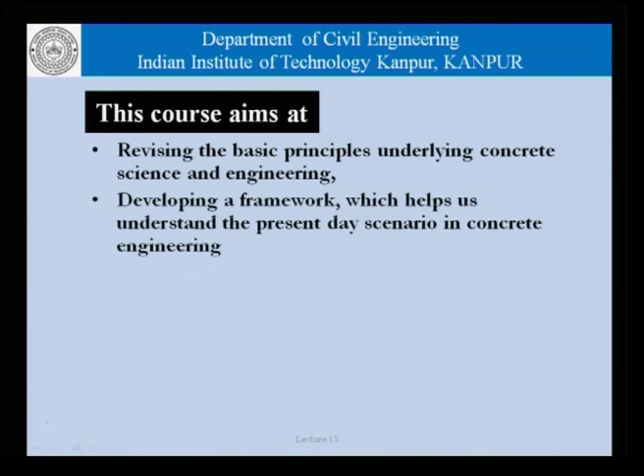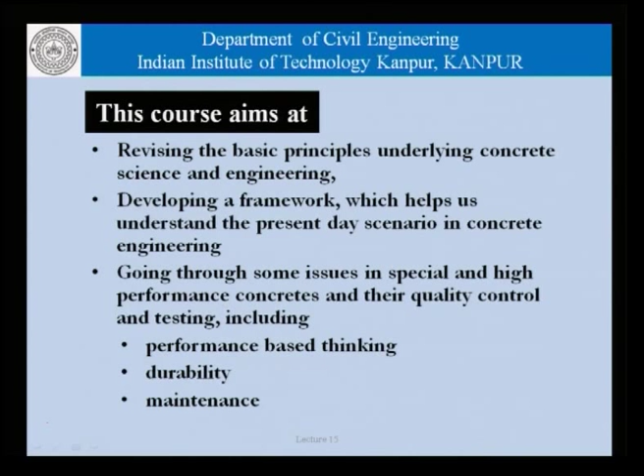Namaskar and welcome to this course, this lecture on concrete engineering and technology. In this course, we are trying to study the basic principles underlying concrete science and engineering, developing a framework which helps us understand the present scenario in concrete engineering with the use of different mineral admixtures, chemical admixtures, construction technologies, and so on. We are going through some issues in special and high performance concretes and their quality control, testing, which includes performance based thinking, durability of these concretes, and maintenance of the structures made using these concretes.

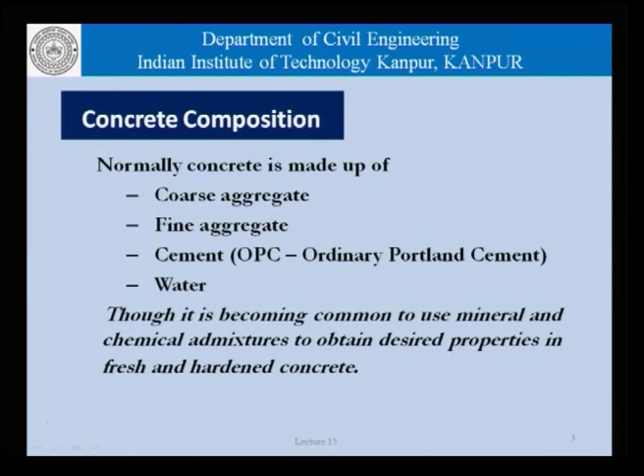To reiterate, normally concrete can be taken to be a mixture of coarse aggregate, fine aggregate, cement. Ordinary Portland cement is what we refer to most of the time in the traditional sense, and water. Even though it is becoming increasingly common to use mineral and chemical admixtures to obtain desired properties in fresh and hardened concrete, an understanding of the basics always helps in building a foundation which is required to understand some of the special concretes which we will be talking about today.

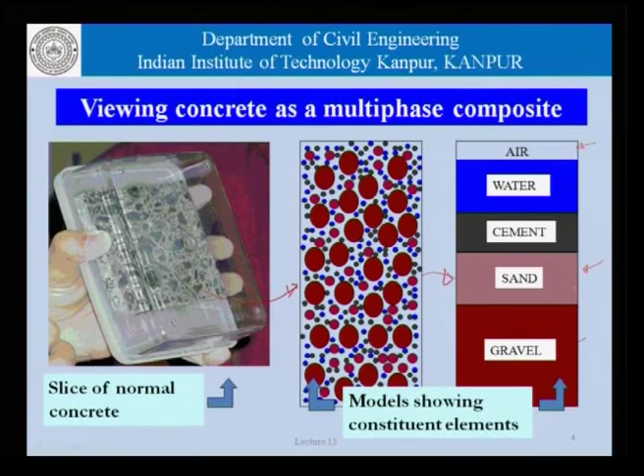The properties of fresh concrete, properties of hardened concrete are basically determined by the properties of the constituents and the proportion that we use. We must remember, in proportioning concrete, we have seen that at the end of it, all the constituents of concrete should contribute a certain amount in terms of volume to the 1000 liters or a cubic meter, and that is what we get as unit content of different materials.

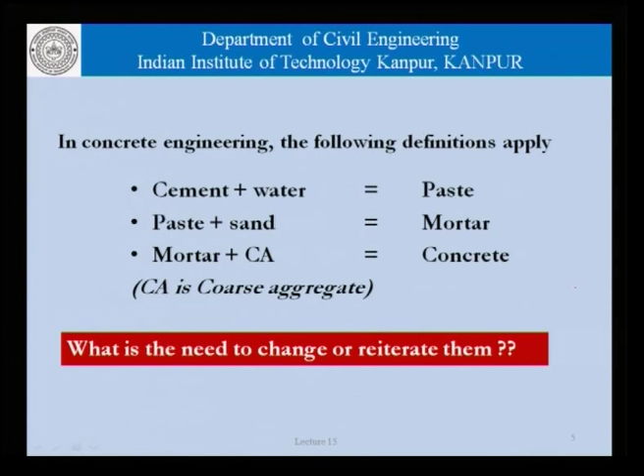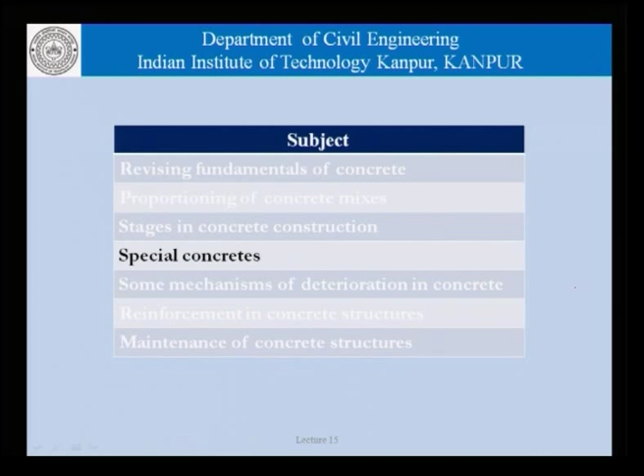This again is the broad outline of the course, which talks of fundamentals of concrete, proportioning concrete mixes, stages in construction, special concretes, mechanisms of deterioration, reinforcement material used in concrete, and maintenance. And today the discussion focuses on special concretes. What is a special concrete?

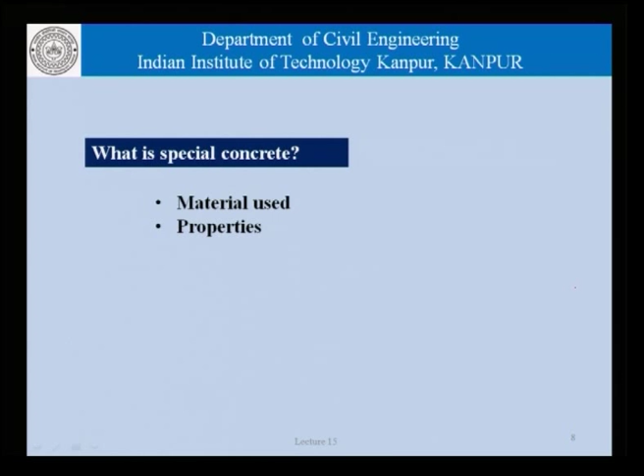And we have tried to answer this question before. It could be based on materials that we use in the concrete. It could be based on the properties of the concrete that we are talking about. A concrete could become special because the method of placing or casting or curing of that concrete is something different, or the environment in which the concrete is cast or placed is different.

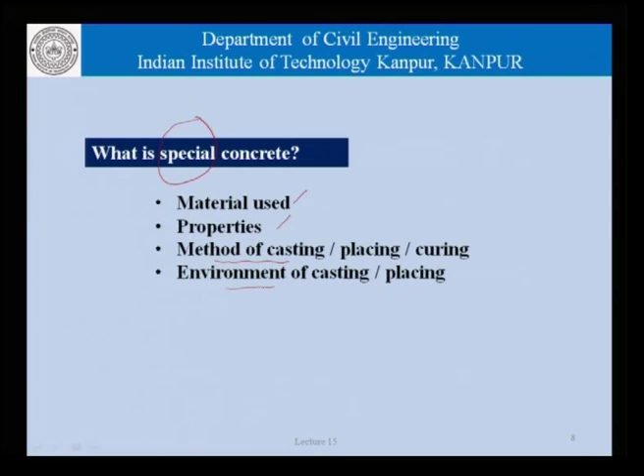What this clearly shows is that in order for a concrete to be special, it has to be different from normal, and therefore, for the materials, properties, the method of casting, the environment of casting, for each of these issues, we must have what we will define or what we understand is normal. If any of those conditions changes, then the concrete becomes special. The concreting method becomes special.

Now, as far as materials is concerned, apart from coarse aggregate, fine aggregate, cement and water, we could use fibers, we could use mineral admixtures. Even if we assume that using mineral admixtures like fly ash or blast furnace slag has become common practice, either in the form of blended cements or as additives in concrete itself, there is a special issue involved when we use high volumes of fly ash, and that is possible and is done in certain specific applications.

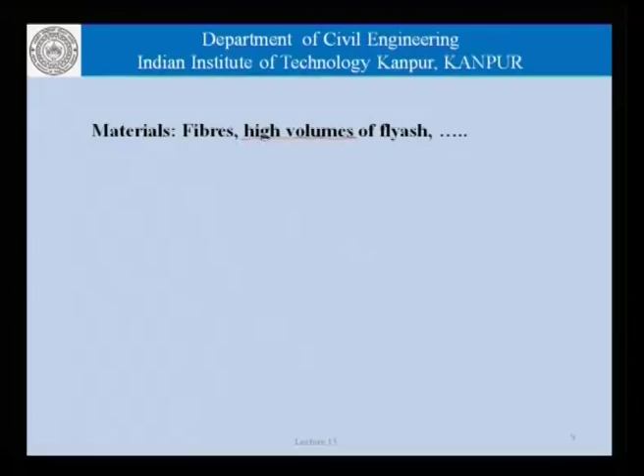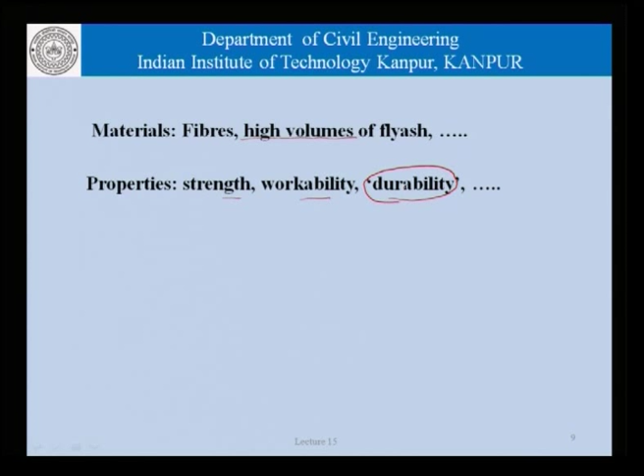Similarly, properties. We talk of properties of concrete in terms of strength, workability, durability. Now, strength is the property that is supposed to be representative of concrete. Most concrete engineers or designers, they talk in terms of characteristic strengths of concrete, and they say, well, M40, M50 and so on. So, what is the normal range? And if it is higher than that, then it is special concrete in terms of high strength concrete. At times, we also try to develop low strength material that need not be used for reinforced concrete construction, but has certain other applications. So, that again is a special concrete.

Similarly, workability. Depending on the method of construction that we use, if we are using normal methods where concrete is carried by wheelbarrows or in pans manually, then we need a certain amount of workability. But if we are trying to pump the concrete, then we need another kind of workability. We need the concrete to be flowing sometimes. So, that is what makes it special.

Durability is a very different kind of property, and attention on durability as a property of concrete is not all that old, even though the importance of different parameters such as water cement ratio, cement content, type of cement used, and their relationship with the environment in which the concrete structure is placed is age old. Specifications did say what are the limits of water cement ratio.

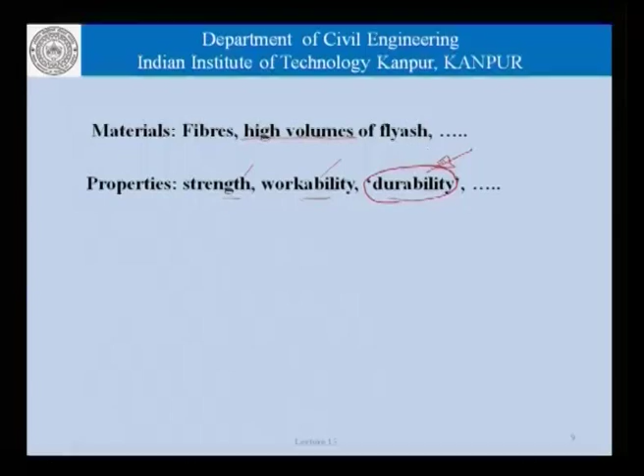As far as methods of construction are concerned, shotcreting, where concrete is gunited onto a surface without formwork, or where concrete is compacted using vibratory rollers, for example in the construction of roads, these are concretes which call for special attention.

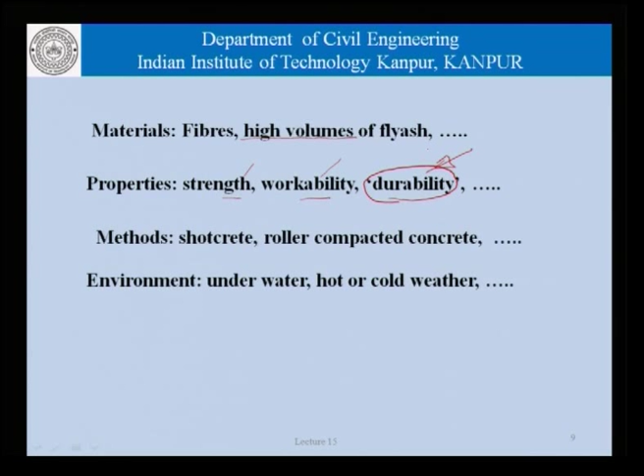As far as the environment in which the concrete is placed, underwater, hot weather, cold weather, these are situations which call for special attention as far as concrete and concreting procedures are concerned. Now, let us look at examples of special concretes, several of them: self-compacting concrete, fiber reinforced concrete,

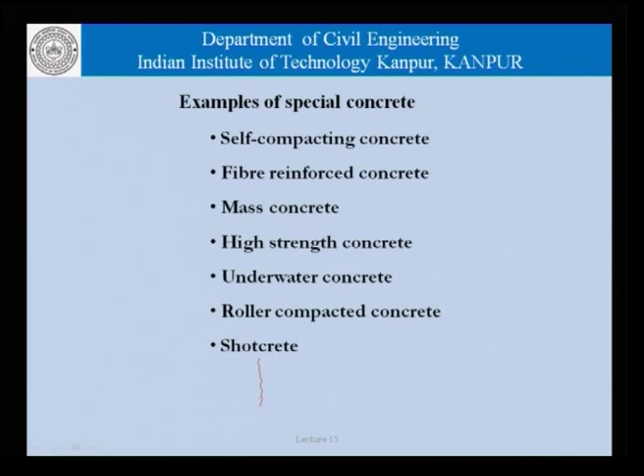mass concrete, high strength concrete, underwater concrete, roller compacted concrete, shotcrete, and that list can go on and on. Now, these are all special concretes because of one or more of the reasons that we discussed, in terms of materials used, in terms of the method of construction, in terms of the properties, or in terms of the environment.

Having said that, it is not possible to develop a special concrete purely based on one of the issues involved. Concrete engineering involves, from another point of view, several aspects. One of them is materials and proportioning.

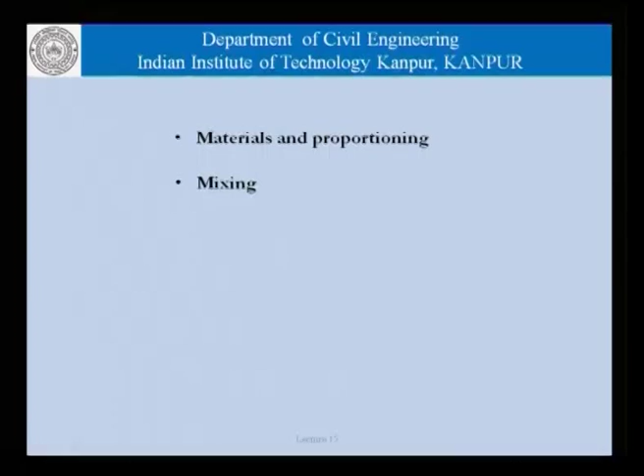What is the kind of materials we use? What is the proportion that we use? What is the process of mixing the concrete? What kind of mixer, volume of mixer, method of mixing, time of mixing, how is the concrete transported, agitator trucks, conveyor belts, and so on.

How is it placed? How is it vibrated? Form vibrated, internally vibrated, not vibrated at all. How it is cured, curing compounds, membranes, gunny bags, underwater, and so on. So, all these considerations are important when we talk of concrete.

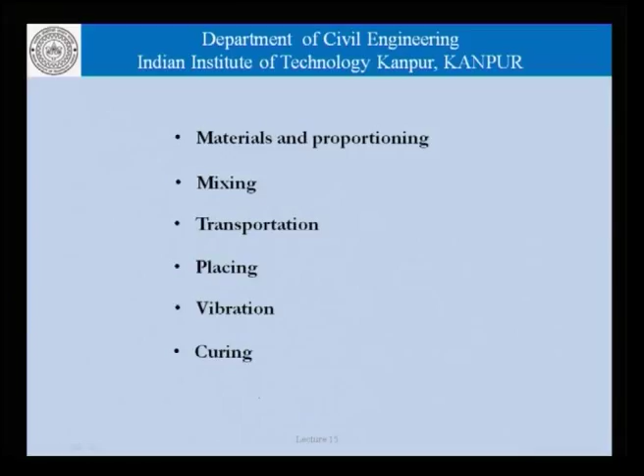Now, when we talk of special concretes, this whole thing is interrelated. So, if we are talking of a special concrete from the point of view of strength, then not only is the materials and proportioning different, but that has implications in terms of mixing, placing, vibration and curing. So only a comprehensive view of all these issues will help us properly handle special concretes.

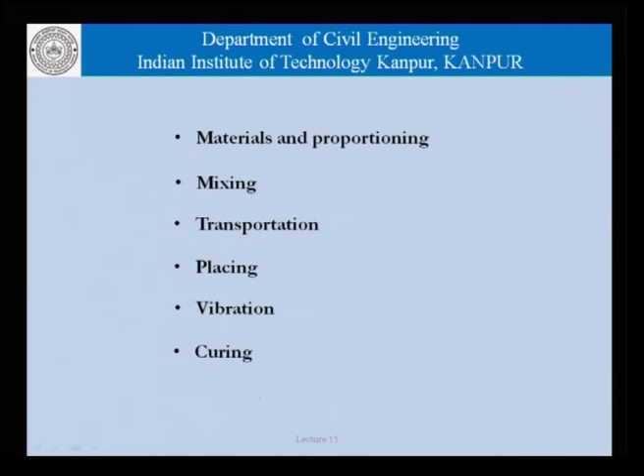I have not even talked of what is high performance concrete. Let me share with you a small digression. In the late 80s and early 90s, the term high performance concrete in concrete engineering was being widely touted, and there was a school of thought that at the end of it, the performance of concrete is basically strength. So high strength concrete is the high performance concrete. Performance and strength were related, supposed to be almost synonymous.

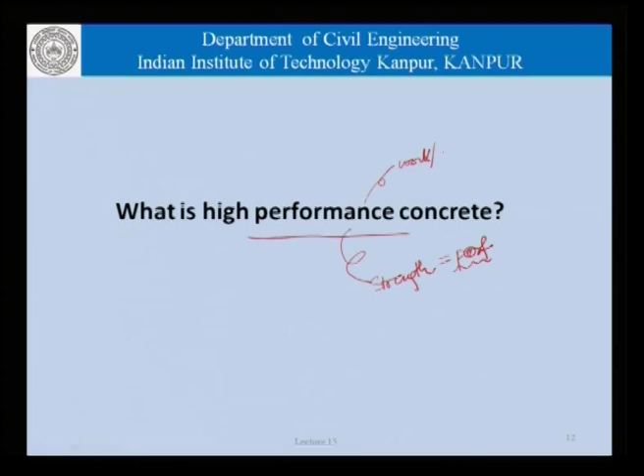But there was another school of thought, researchers and engineers working on other parameters, like workability, or a concrete which did not require to be vibrated, which would help us produce concrete of more uniform quality. That was touted as performance. So finally, what has happened is that no matter what parameter we use, it could be workability, strength, or durability, so long as the performance of that concrete is higher than what is normally expected on that parameter, the concrete can still be called a high performance concrete.

Now, we have talked of these examples of special concretes, and today we will focus on high strength concrete.

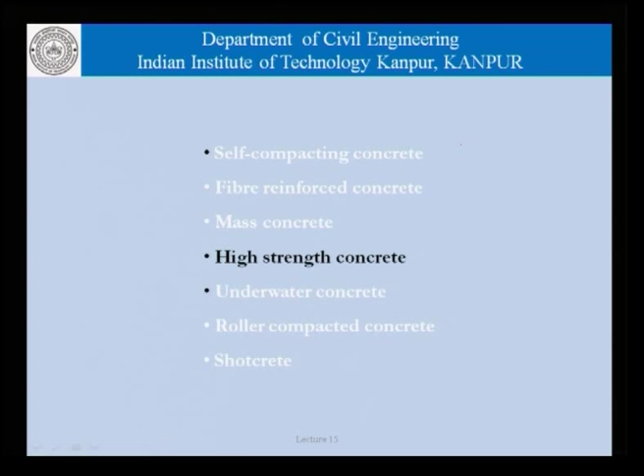Now, as the strength of this mortar phase is increased, how do we increase it? We know that the only way that strength can be increased is by reducing the water cement ratio, that is, either put more cement or use less water. So as we increase the strength of the mortar...

We get higher and higher strengths, so long as the ITZ does not become a bottleneck. In high strength concretes, we are talking of a situation where the mortar phase is very strong. The strength of the mortar phase itself depends on the porosity and the pore size distribution, more porosity than pore size distribution perhaps. So in high strength concretes, we try to control the porosity, which we know is related to the water cement ratio. Once we keep in mind that in high strength concretes we have reduced porosity because we use very low water cement ratios, the strength of the mortar phase is much larger or much more than in traditional concretes.

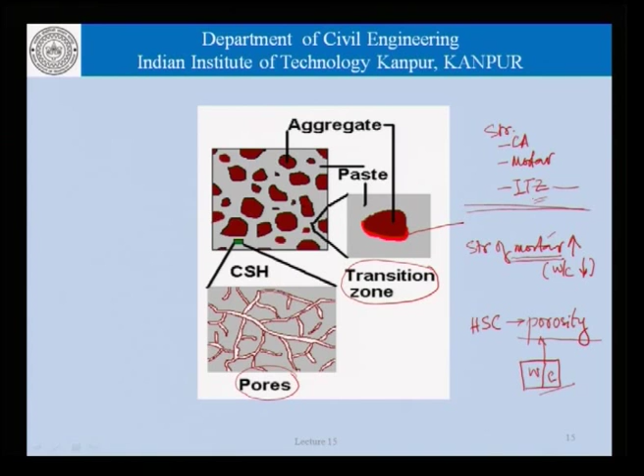The ITZ is also stronger. There is less bleeding in the concrete, and therefore the ITZ formed is not that high in water cement ratio. Then we will be able to appreciate and discuss the properties, the construction method, the proportioning and so on of high strength concretes with a lot more ease.

Now, once we talk of high strength concretes, we must remember that there is no universal definition of high strength. High strength simply means high strength, but then there are different norms of what may be called high strength. For example, the Japan Society of Civil Engineers puts down a level of characteristic strength of 60 to 100 newtons per millimeter square to be treated as high strength concrete.

IS 456, the code in India, mentions 3 categories of strength: ordinary, which is M10 to M20, standard, which is M25 to M55, and high strength, which is M60 to M80 concrete.

So we should remember that specifications such as the JSCE and IS 456 define characteristic strength on the basis of tests of cylinders and cubes, and the grade cannot be directly compared only on numbers. The JSCE defines these values in terms of cylinders with 100 mm diameter and 200 mm length, whereas IS 456 talks in terms of 150 by 150 by 150 mm cubes.

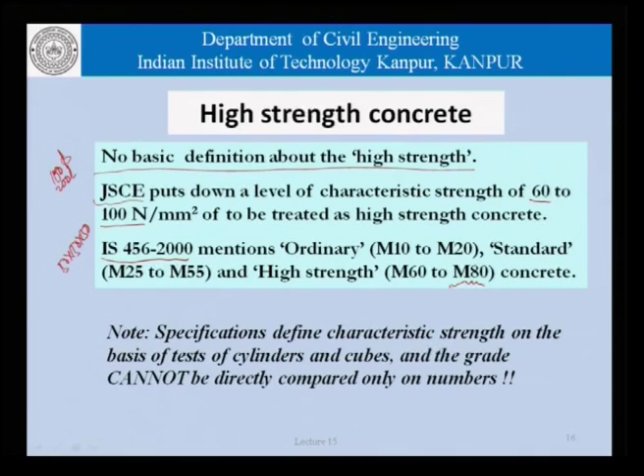That is something we must bear in mind when talking of high strength concrete. As to who is talking about high strength concrete, what specification provisions will apply depends on one specification to another. For a particular strength, one specification may say provisions relating to high strength concrete apply, whereas another may say no, they do not apply, it is just normal concrete.

As far as concrete strength is concerned, we should also remember that concrete structures are built in the field. They are normally not factory made products, and therefore the strength we are talking about, even though based on laboratory tests of cylinders and cubes or whatever the specifications may require, what the engineer keeps in mind is that finally the strength has to be achieved in the field with conditions of transportation, placing and curing as may be applicable, and the technology available in the field. That is why different specifications drawn by different countries naturally take into account the kind of construction technology that is normally used.

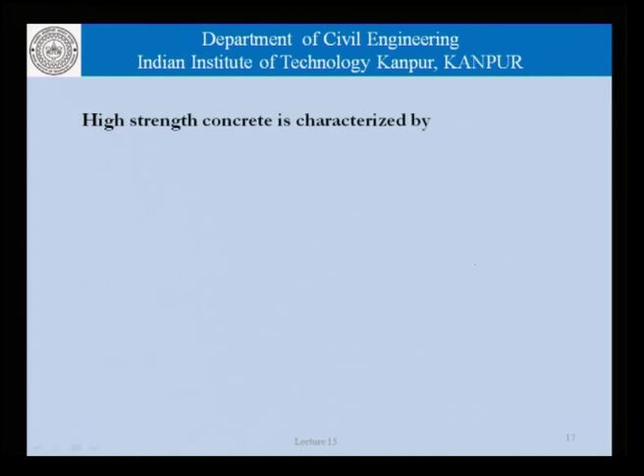High strength concrete is characterized by low water cement ratio. Unless we lower the water cement ratio, the water available beyond that required for hydration of cement cannot be controlled, and that excess water is responsible for the creation of pore spaces. If we reduce that excess water, the amount of pores generated is less, porosity is less, and strength is high. So high strength concrete is characterized by low water cement ratios, typically 35% and below.

How can we reduce the water cement ratio? One is to reduce the water content, but we cannot reduce it below a certain level because that is the minimum required for workability and so on. Therefore, the only other option we have is to increase the cement content.

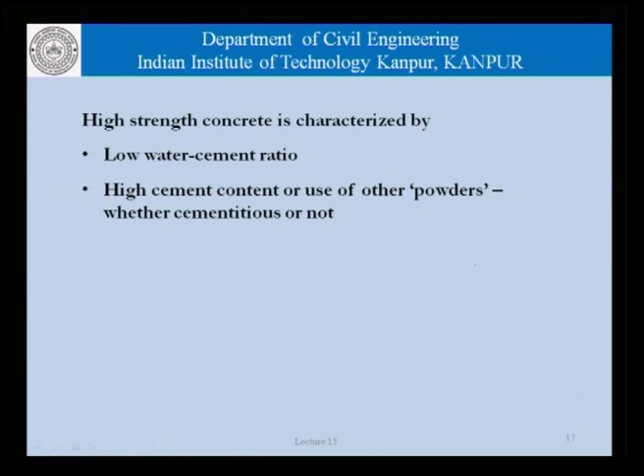So high strength concrete is characterized by high cement content or use of other powders, whether cementitious or not. Using high cement content has its own implications in terms of heat of hydration, economy and so on. But since we need not only cement, but also need to increase the paste content, we very often use mineral admixtures such as fly ash, blast furnace slag, or silica fume to increase the strength.

Some of these products contribute to strength by formation of the CSH gel in the secondary pozzolanic reaction, or they simply occupy the spaces in the pore space, reducing porosity, or they just contribute to the paste content by sheer presence. Things like stone dust would be in that category. They do not necessarily participate in the pozzolanic reaction, but their fineness is such that they can be counted towards paste content, which is also required to be increased for high strength concrete.

One of the options we mentioned was reducing the water content. Reducing the water content can be achieved through high doses of superplasticizers. We have seen an example where, by using a certain amount of superplasticizer, we can reduce a certain amount of water demand for a given level of workability. So if we want to reduce the water content for a given amount of workability, using superplasticizers is almost the only way out.

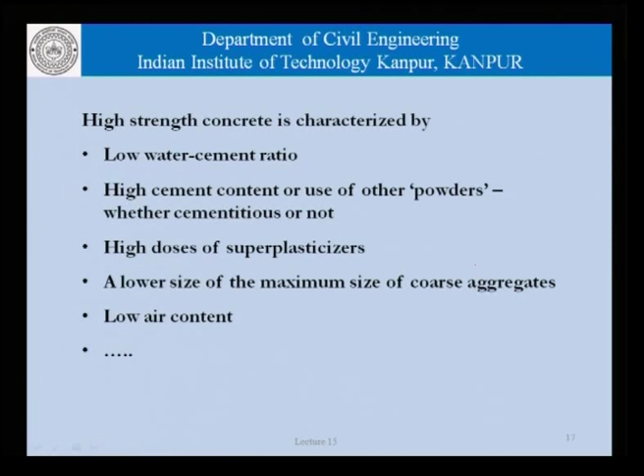Low air content. High strength concrete is also characterized by a low air content. We shall see in a slide the provisions related to air content. There could be a lot of other properties which we can list and enumerate as far as high strength concrete is concerned.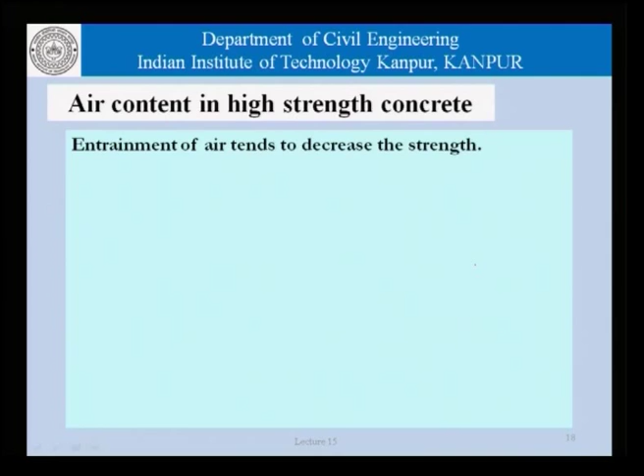Now, coming to air content in high strength concrete, it is known that entrainment of air tends to decrease the strength. Even though we do air entrained concretes for different reasons, we do not explicitly take that into account because of other benefits that follow. But indeed, air at the end of it contributes to some kind of voids being created within the concrete, and that tends to decrease the strength at least to some extent.

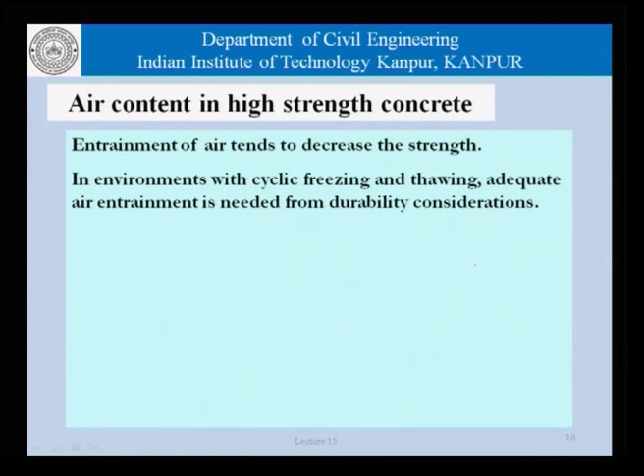As far as high strength concrete is concerned, that is quite an unacceptable position, and therefore we must try to control that. In environments with cyclic freezing and thawing, adequate air entrainment is needed from durability considerations, but prescribed lower limits on air content could be, if no freezing and thawing is present, around 2%. But if freezing and thawing resistance is required, the air content requirement goes down as the required strength increases. So basically the designer makes a choice that if we push the strength higher, we have to sacrifice the air content.

We cannot get the benefits of air content all the time. So as far as normal concrete is concerned, we can have 5% or 6% air sometimes, but once we get into high strength concrete, strength ranges of 60, 70, 80 and so on, the air content has to be restricted.

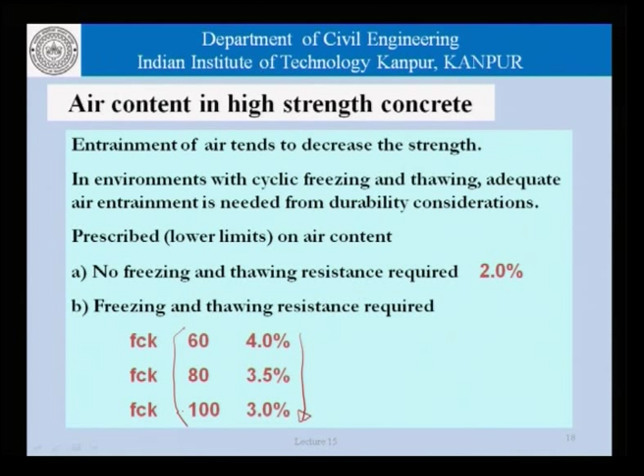Let us talk a little bit about some of the considerations that weigh on the mind of an engineer as far as high strength concrete is concerned.

Because of the low water cement ratio and the high cement content, high strength concrete could have large autogenous shrinkage and large amounts of heat liberation on account of heat of hydration.

Traditionally, mass concrete was defined as concrete where the structure was large or the pour volume was large, to the extent that the heat dissipation that took place from the surface was not sufficient to handle the heat liberated.

In the case of high strength concrete, even with adequate surface area, because the amount of heat liberated is large, because the cement content is high, even concrete members of the size that would normally not be considered mass concrete would have to be treated with provisions of mass concrete.

Once we have mass concrete related considerations or shrinkage related considerations arising out of the high amounts of cement, we could have cracking in the concrete, non-structural, but cracking nonetheless. That is something which will require special attention from the point of view of water tightness, durability and so on.

High strength concrete is very good as far as durability is concerned because porosity has been reduced, but if we allow cracks to form in high strength concrete, then the whole purpose is lost. As concrete engineers we must keep in mind that having a high characteristic strength of concrete is not really good enough to ensure high durability. For durability, we need to do a lot of other things other than strength, such as controlling cracks and so on.

Further, strength of concrete in the structure itself is of concern given the difference in curing regimes, the scale of casting and so on.

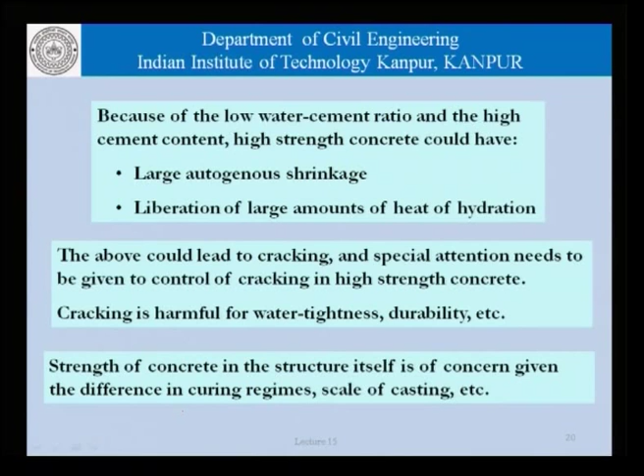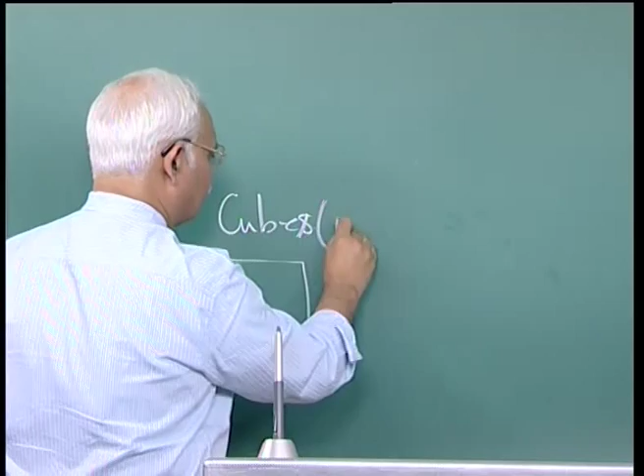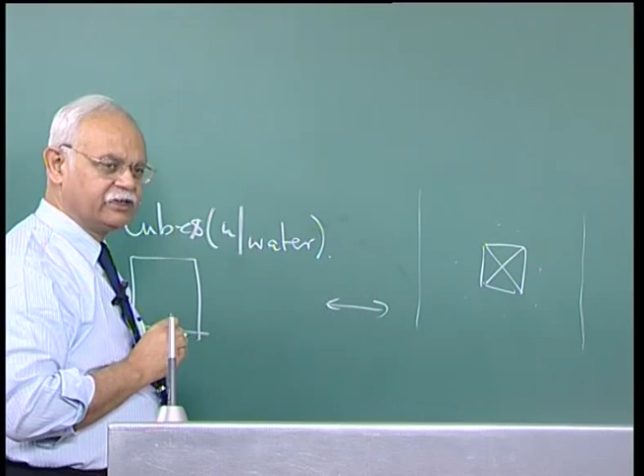In a normal concrete, if we do the quality control using cubes which have been cured underwater versus a situation where a certain member has been cast and the concrete is sitting here, in normal circumstances, the environment here as far as temperature and so on is concerned is not so different from this atmosphere. But when it comes to high strength concrete, the temperatures here are higher than normal.

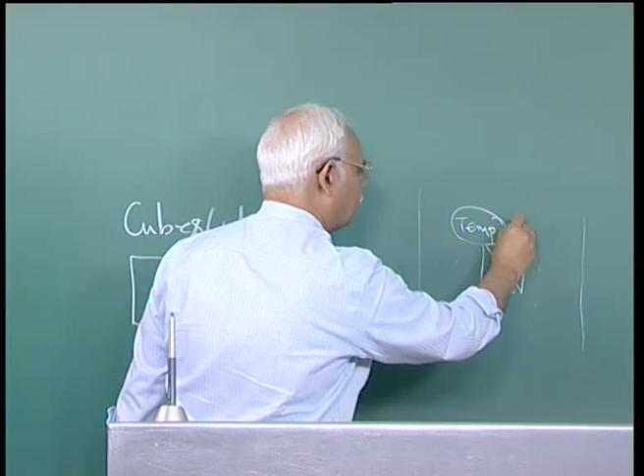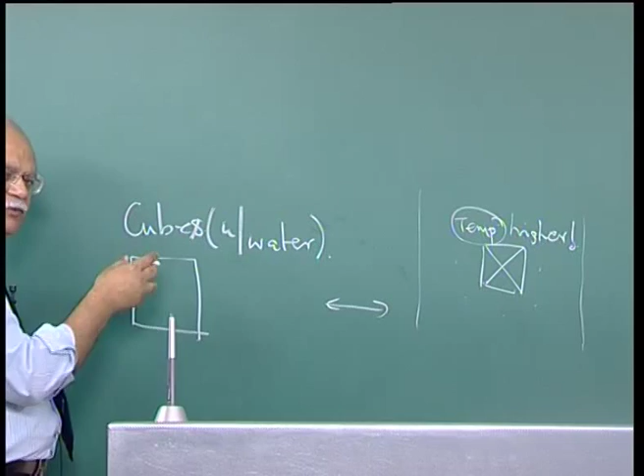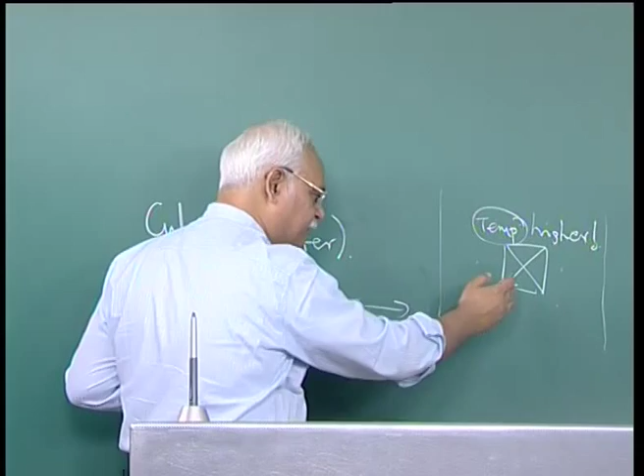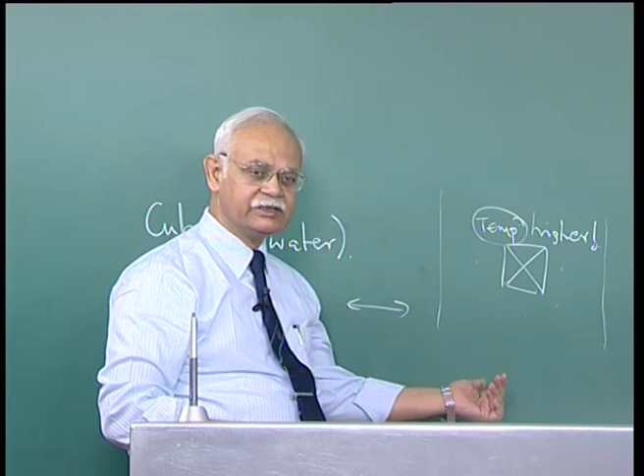Therefore, when we cure the cubes, the curing regime of cubes which are used for quality control is quite different from the curing regime or the environment surrounding the concrete in a high strength concrete structure. This difference starts becoming prominent and has to be accounted for in our quality control procedures and also in attempts to figure out what is the strength of concrete in the structure.

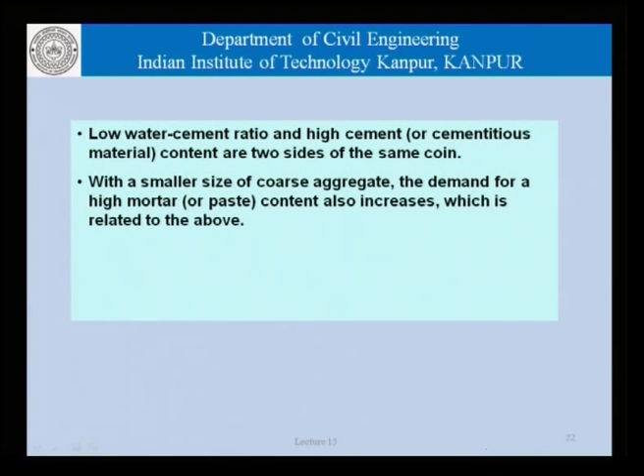Now, low water cement ratio and high cement or cementitious material content are two sides of the same coin, and we have already talked about that. With a smaller size of coarse aggregates, the demand for high mortar or paste content also increases, which is related to the above. That causes us to use more powder in the system, and the concrete becomes more homogeneous in the absence of the larger coarse aggregates.

Concrete is not a homogeneous material at the millimeter level. It can be considered homogeneous if we consider reasonably larger unit sizes, and that unit size which is required to be considered for concrete to be assumed homogeneous is related to the maximum size of the coarse aggregate used.

If we are using large coarse aggregates, then we will have to consider a much larger area in order to say that, okay, if that area is replicated all over the place, the concrete is homogeneous. Those of you who work or have a background in finite element analysis would understand this concept very simply. In order to assume that concrete is homogeneous, you are making an assumption that the aggregates, the mortar, and the ITZ all have the same strength, which is obviously not true.

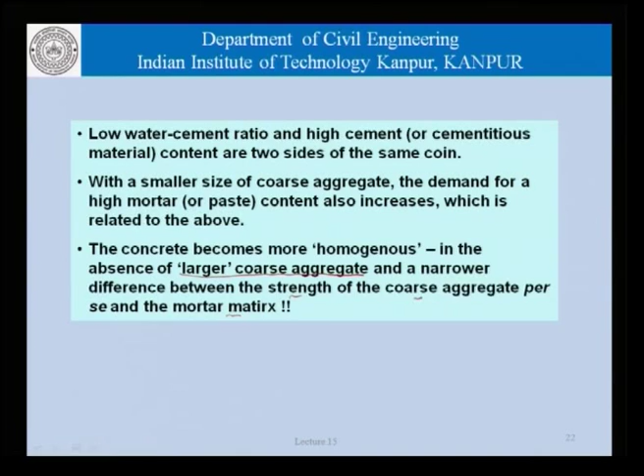So, if we are able to remove the larger coarse aggregates, the concrete becomes more homogeneous, and also the gap between the strength of the coarse aggregate and the mortar matrix is narrower. So, compared to normal concretes, high strength concretes are more homogeneous.

Now, this concrete becoming more homogeneous has very interesting implications. Crack growth becomes more rapid and the concrete is more brittle than normal strength concrete.

The crack growth in concrete relates to the stress strain curve. The stress strain curve is only a representation of how the material deforms as stresses are applied, and as stresses are applied, more cracks are formed in the system. So indirectly, the stress strain curve can be taken as a representation of crack formation and crack propagation in concrete.

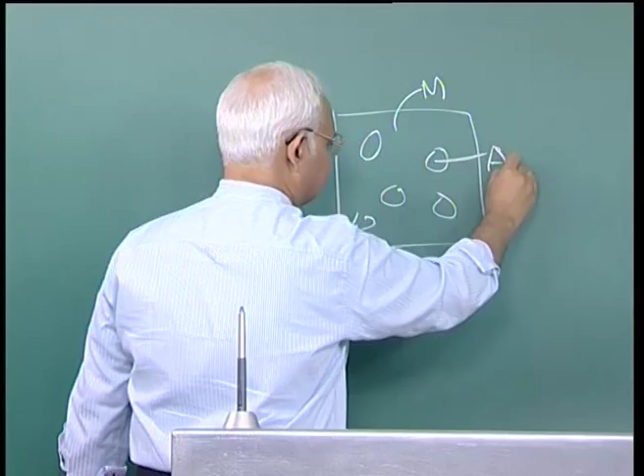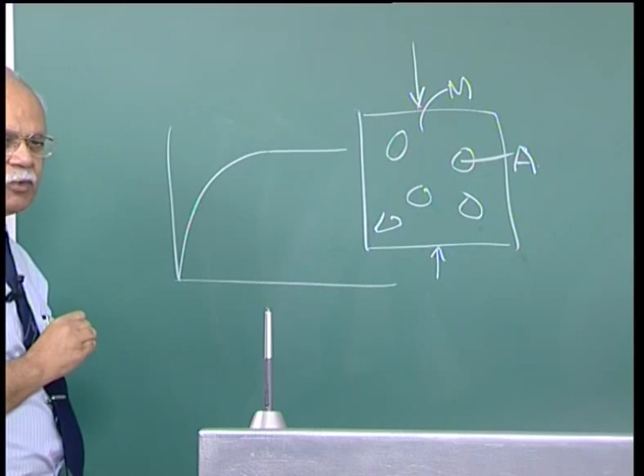As far as normal concretes are concerned, if we look at a normal concrete, there are aggregates and we have mortar. Now, if load is applied on this concrete, we get the stress strain curve. We know that this is one of the model stress strain curves which are used.

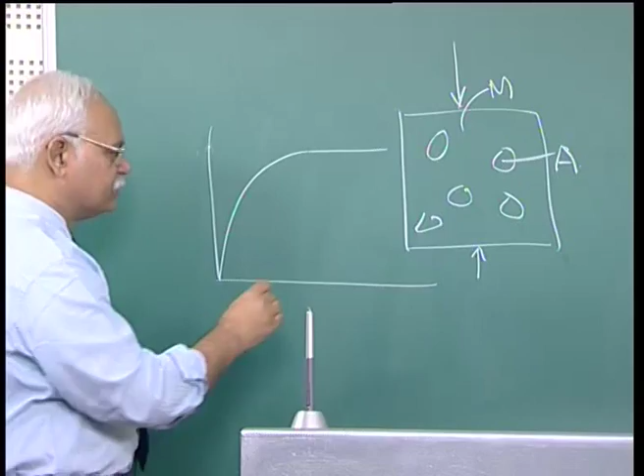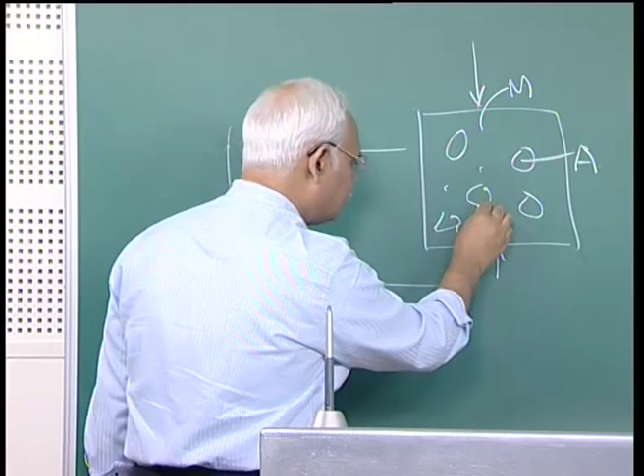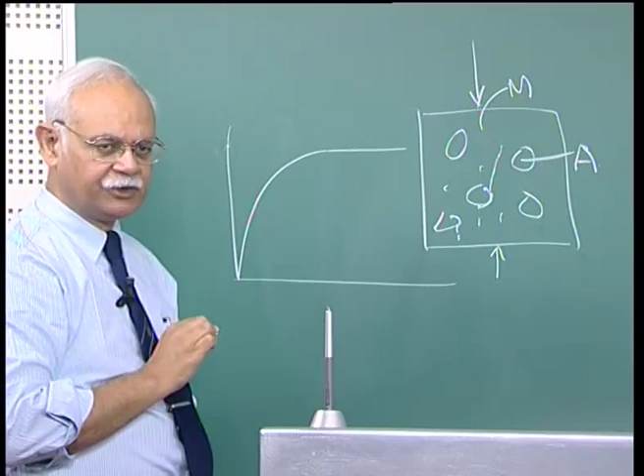Why is it non-linear? Because as micro cracks are formed here initially, they tend to connect at the coarse aggregates. Some kind of crack propagation takes place through the interfacial transition zone, and then larger cracks are formed, which cause the concrete to fail.

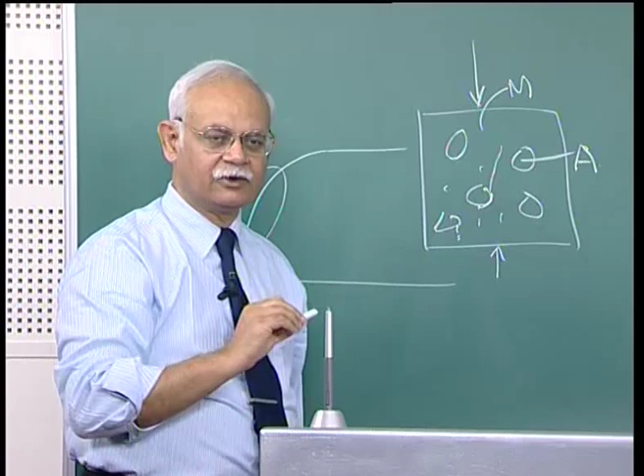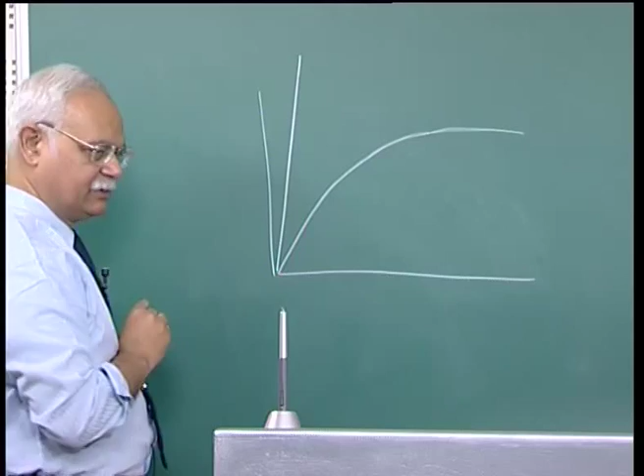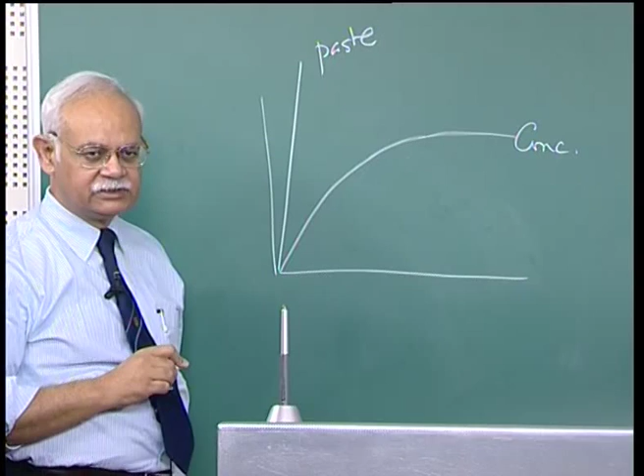In the case of high strength concretes, this process where cracks have a stable growth does not exist. So if we look at the stress strain curves of concrete and paste, this is the stress strain curve for concrete and this is for paste.

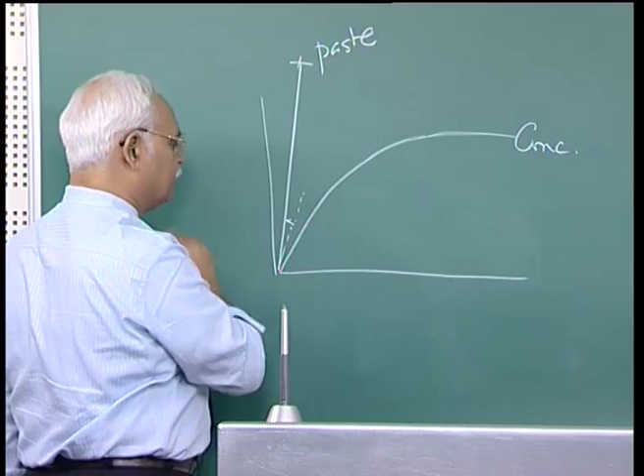Because the material which is paste is more homogeneous, the crack propagation is rapid and the material is more brittle. So the high strength concrete tends to come closer to paste, and that is something we must keep in mind when we talk in terms of properties of high strength concrete.

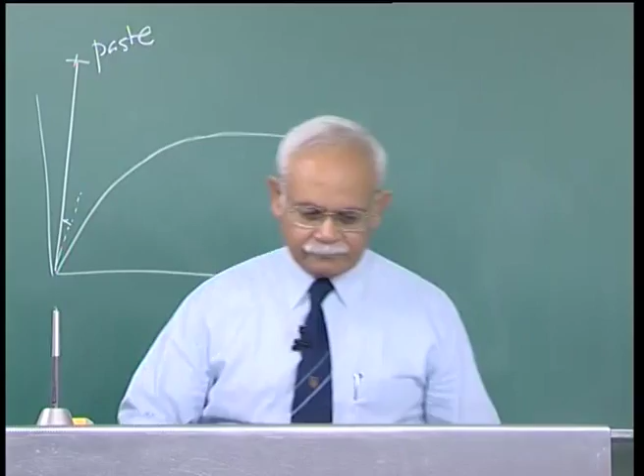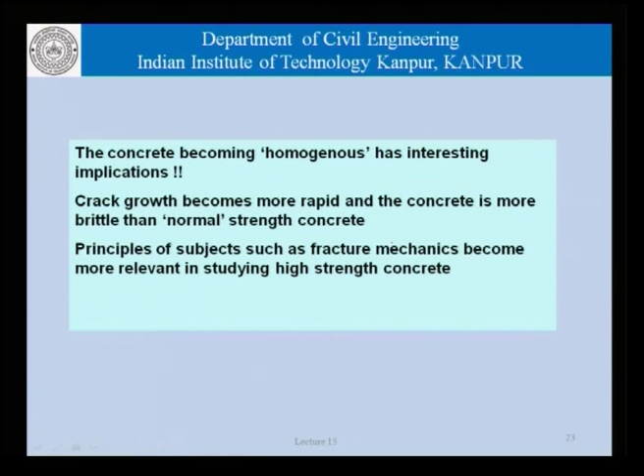The principles of subjects such as fracture mechanics become more relevant in studying high strength concretes. Fracture mechanics is the science that studies crack formation, crack propagation, and so on. If you read the literature on fracture mechanics, you will realize that the whole set of assumptions made in fracture mechanics are more valid when we are talking of high strength materials, more homogeneous materials within concrete, than normal concrete.

As far as properties of high strength concrete are concerned, fire resistance is reported to be suspect due to the difficulty in the movement of trapped moisture at elevated temperatures. Concrete could have some moisture trapped inside, and that moisture must be able to escape in the event of fire, because the temperature in the concrete rises.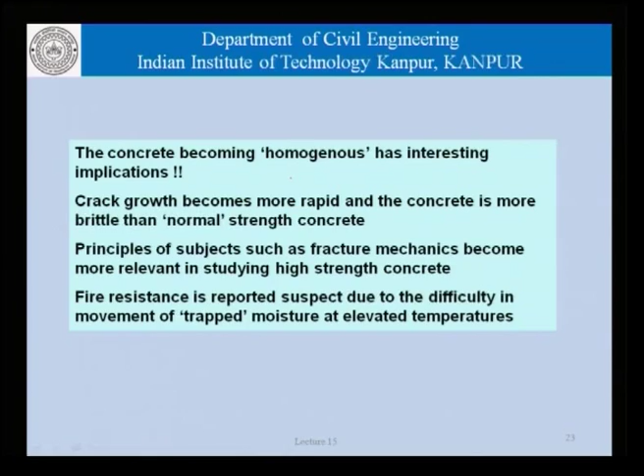Now, in the case of high strength concrete, because of a different kind of pore system, that water finds it difficult to escape. And if the water cannot escape, it gets converted to vapor, exerts pressure and causes local explosions, which damage the concrete, and the performance of concrete at elevated temperatures under fire becomes suspect.

Coming to the properties of high strength concrete, let us talk in terms of consistency, which is the property for fresh concrete. Let us talk of a regime where the slump is less than something like 21 centimeters or 200 mm or 210 mm or something like that.

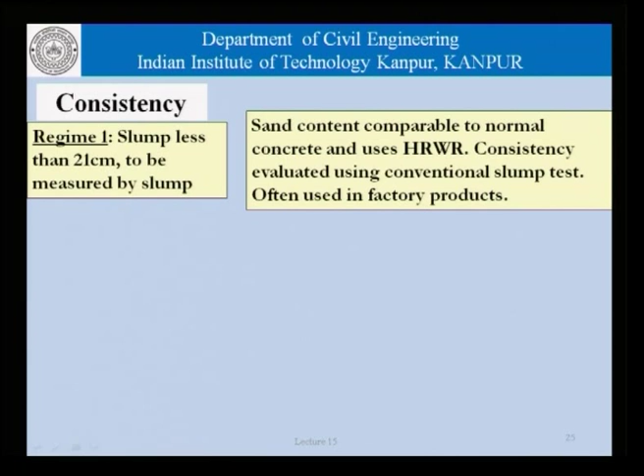At this level, the sand content in the concrete is comparable to normal concrete, and that concrete has high range water reducers, and the consistency can be evaluated using the conventional slump test, which is used in factory products. Whereas if the slump becomes more than 24 centimeters or 240 mm, then we cannot really use slump as a measure for the consistency or workability of the concrete, and we get involved with the slump flow regime.

This is what happens when we are talking of a higher sand content, which implies a higher mortar content, present in concretes with low water binder ratios, as high strength concretes have, using air entrained high range water reducers and so on. This is the kind of concrete used when we are trying to develop self compacting high strength concretes. So there are two distinct ranges of consistency.

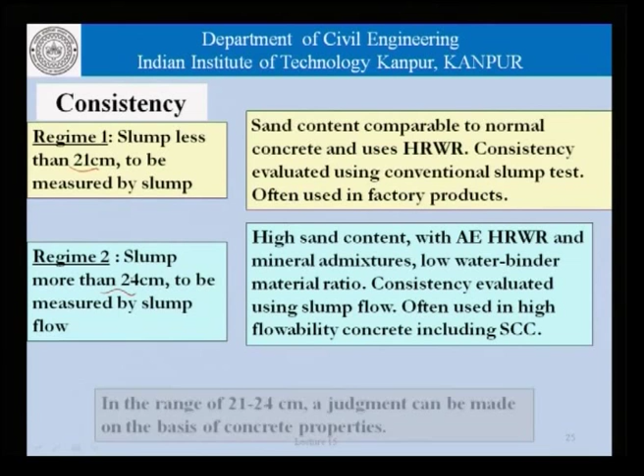One is where by the sheer use of superplasticizers or high range water reducers, we are able to get to a level where the strength becomes high enough for the concrete to be called high strength concrete. In another situation, we have gone beyond that range where slump can be used, and we must use slump flow. Depending on where we are using the concrete, in the factory for making precast products, or whether it is being used at site, we need to make our judgments, proportion the concrete in a certain manner, and so on. Between 21 centimeters and 24 centimeters, we need to make a judgment.

When it comes to construction using high strength concrete, we must remember that the concrete is now characterized by the presence of a large amount of paste or mortar, which makes the concrete very viscous. Once the concrete has become viscous, needle vibrators are less effective than in the case of normal concrete, and therefore the spacing and the time of vibration needs to be carefully chosen.

The bleeding in high strength concrete is less. The surface should be protected against drying, because if the surface is susceptible to drying in high strength concrete, the reduction in strength could be very drastic, and that is why we must make sure that the surface is protected against drying.

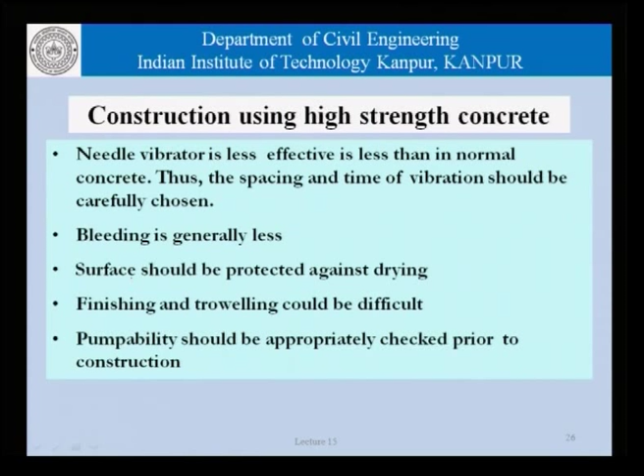Finishing and troweling is difficult. Pumpability should be ensured before construction, because once the concrete becomes viscous, pumping it is not really the same thing as pumping normal concrete, which has a certain amount of flowability.

Now let us talk a little bit about determining the strength for high strength concretes as far as quality control is concerned. One thing that comes to mind is the age at which the quality control should be carried out. Since mineral admixtures are often used along with Portland cement, strength development, at least in the initial part, could be slow, and this could be accounted for by allowing quality control tests at an age later than the normal 28 days, say 56 or 91.

Now, there are two arguments which go in favor of such a treatment. One is the fact that we are using mineral admixtures which possibly will have pozzolanic reactions and contribute to strength development at a later stage, and therefore we should do the quality control at a later date. Secondly, the structures are very often not really loaded within a month, and therefore there is no harm in saying that we will wait for more strength development to occur over a period of 2 or 3 months before we carry out a final check as far as quality is concerned.

Now, what is the other side of the story? The other side is that even though 1 month is late enough, if we wait for 2 or 3 months and then find out that for some reason the strength has not reached the level where we thought it would, the construction process would really be in big jeopardy, and therefore a very careful thought has to be given.

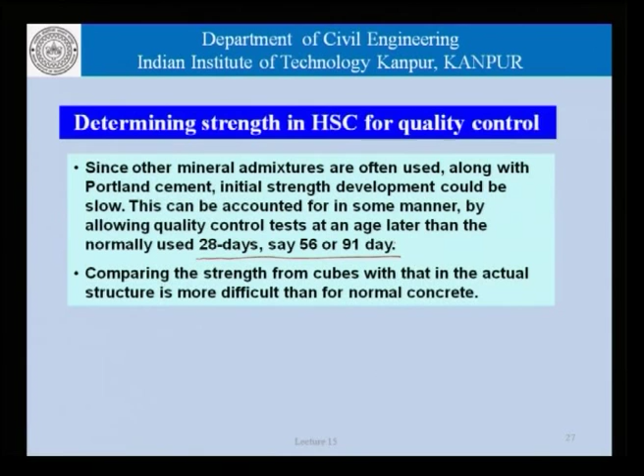We have already talked about comparing the strength from cubes with that in the actual structure. We have talked about the stress strain curve, which is steeper than normal concretes. Another thing that happens is the capacity of the machine required is much higher in order to carry out the tests.

As the strength increases, we need machines of higher and higher capabilities to be able to carry out the compression test, to cause those specimens, whether cubes or cylinders, to fail, and that becomes a problem in high strength concretes, because we may not have so many machines in the neighborhood of that construction site to be able to carry out that test.

Not only the strength or capacity, but also the stiffness of the machines and other testing parameters, the rate of application of load, condition of the specimen - all these things become very, very important when we are talking of quality control of high strength concrete from the point of view of testing.

Now, there can be an argument built up for a smaller size specimen, which will help us from the point of view of the capacity of the machine required. We use, for example, in India, 150 mm cubes, or somewhere we use 10 centimeter by 20 centimeter cylinders.

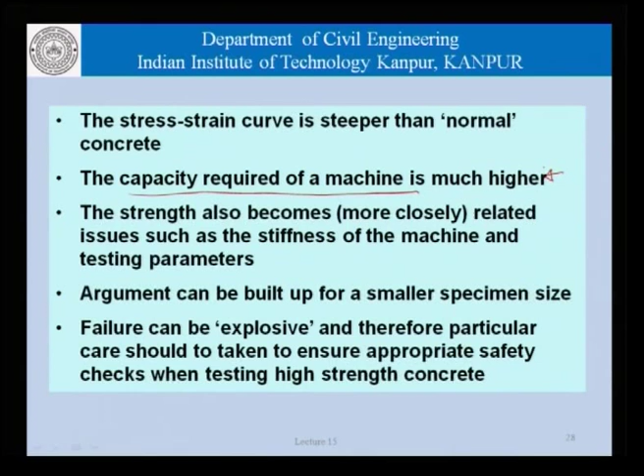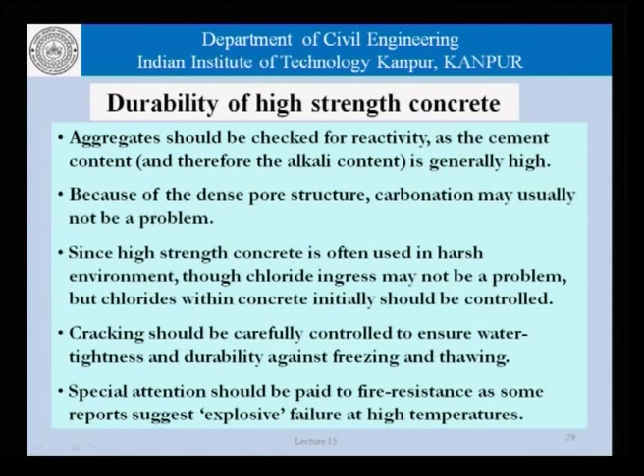Cracking should be controlled to ensure water tightness and durability against freezing and thawing, which is related to air content, and special attention should be paid to fire resistance, as some reports suggest explosive failures at high temperatures.

And lastly, coming to some simple things related to design using high strength concretes, we must remember that empirical equations for estimates of properties such as the modulus of elasticity, tensile, bond or shear strength are not valid, and efforts need to be made to get these through experiments.

Very often a specification will tell us that E can be taken to be 5000 root of FCK, or the modulus of rupture can be taken to be something related to FCK or the root of FCK.

These equations are valid only for the range in which they have been tested, and since the data for high strength concretes is not all that voluminous, it is not prudent to use these kind of correlations which exist for normal concretes for high strength concretes as well, and that is something the designers have to keep in mind.

Also, the lack of ductility of the concrete needs to be factored in.

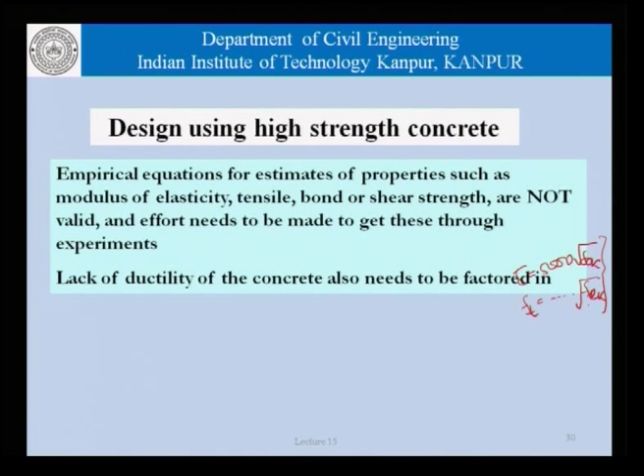Before we close, as usual, we will have some questions which we should try to answer to improve our understanding of the issues that we have talked about today.

Study the applications of fracture mechanics principles to concrete engineering, especially in the case of high strength concrete. You will find that a lot of researchers have tried to apply fracture mechanics principles to paste and mortar, and in some cases high strength concretes. What are the kind of parameters they use, how do they evaluate them in fracture mechanics, and so on.

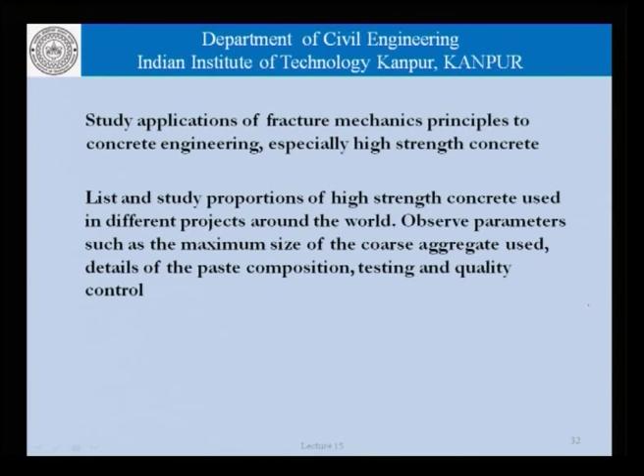List and study proportions of high strength concrete used in different projects around the world. High strength concrete has been used in a large number of projects across the world, where quality control has been carried out at different ages, using different sizes and shapes of specimens. So if we make a list of that, we will observe differences in parameters such as the maximum size of coarse aggregate used, the details of paste composition in terms of supplementary cementitious materials or mineral admixtures used, the superplasticizers used, and so on, and the testing and quality control procedures.

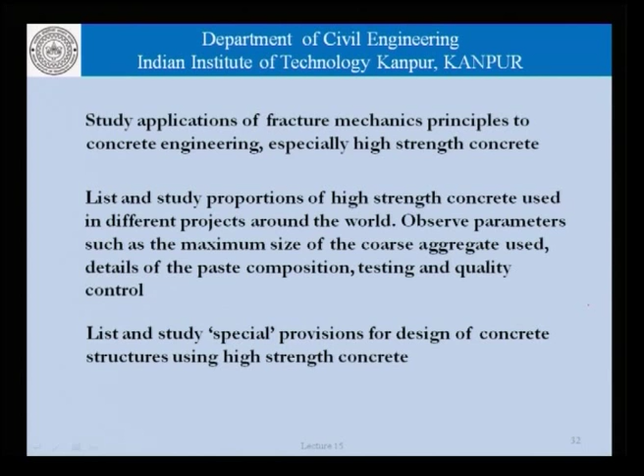And I would like you to list and study special provisions for the design of concrete structures using high strength concrete. And with this, we come to the end of the discussion today. Thank you.